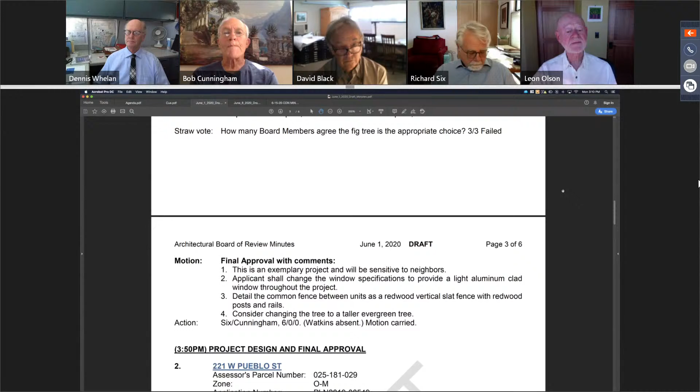This is Mary, I will take roll call. Vice Chair, Aye. Board Member Black, Aye. Board Member Cunningham, Aye. Board Member Olson, Aye. and Board Member Whalen, Aye. Okay, motion passes. Thank you.

Moving on to the approval of consent calendar for June 8th and June 15th. Are we taking them as a group of two? Let's just do the 8th first.

Move that we approve. Second. First, let's go through the motion. Item A, 300 West Pueblo was given project design and final approval with comments. Item B, 2015 State Street was given project design approval and final approval with comments. Item C, 424 Por La Mar Drive was given project design approval with comments. And 101 South Canada was given approval of its review after final with condition.

All right, so you want to repeat those motion and the second, please? I'll move that we approve. Second, second, thank you, Cunningham and Olson. So we have a motion on the floor.

This is Mary, I will take roll call. Vice Chair, Aye. Board Member Black, Aye. Board Member Cunningham, Aye. Board Member Olson, Aye. and Board Member Whalen, Aye. Motion passes. Thank you, thank you.

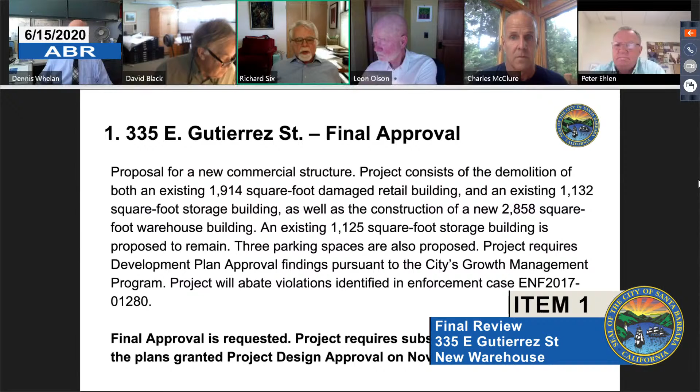Item number 1 is 335 East Gutierrez for final approval. This is a proposal for a new commercial structure. The project consists of demolition of an existing 1,914 square foot damaged retail building and an existing 1,132 square foot storage building, as well as construction of a new 2,858 square foot warehouse building. An existing 1,125 square foot storage building is proposed to remain. 3 parking spaces are also proposed.

The project requires development plan approval, findings pursuant to the city's growth management program. The project will abate violations identified in enforcement case ENF 2017-01280. Final approval is requested. The project requires substantial conformance with the plans granted project design on November 4th, 2019.

I see that our applicant is present, so please identify yourself and begin your presentation.

Peter, you're on mute. Mr. Ehlen, you have to unmute yourself using the microphone icon. I'll send you an unmute request as well. If you just accept that, there you go. Can you hear me now? Yes, we can. Okay, life is good.

Thank you, board members. I'm Pete Ehlen, architect for the project, and with me today is Chuck McClure, our landscape architect. As Richard said, we received our project design approval last November, and we're here with some updates and changes we've made to the plans since you gave it the project design approval. Our real goal here today is to get final approval and get into the building department. If you have additional concerns, we're happy to address them, but we'd like to do that while we're in the building department.

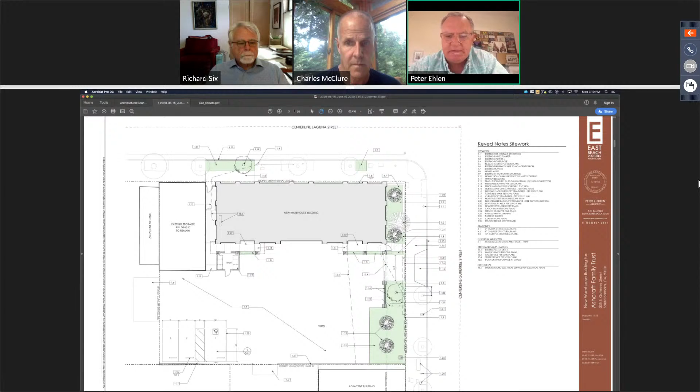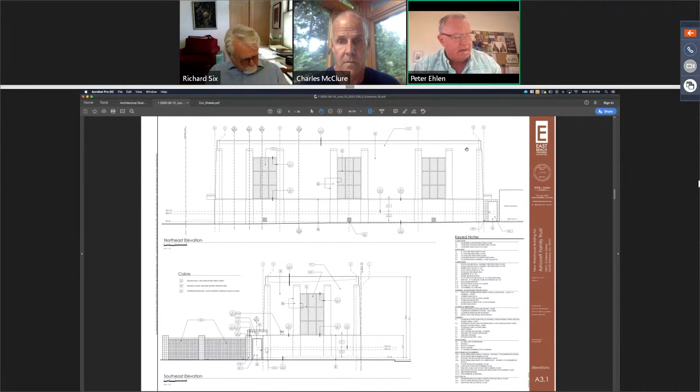On the southeast elevation down the bottom, you can see where we have the gate. There you go. Going to an exposed block just for the columns there, just to break up some of the monotony that it was starting to look like to me. In addition, we've got a fire bell detail on there as well.

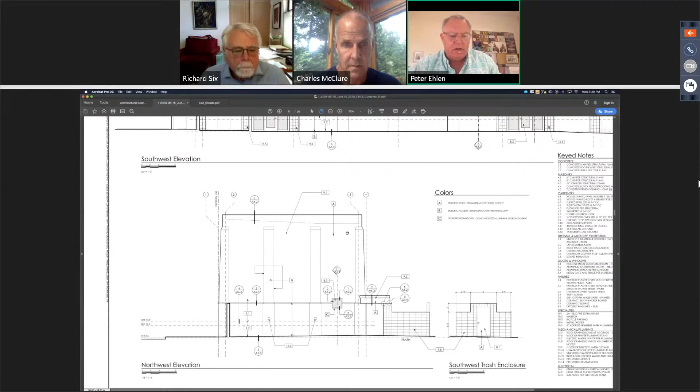Then we go to the next sheet, sheet number 9. Again, pretty much what you saw previously, with the exception that the columns on the southwest elevation there would just be an exposed block and a scored 8x8 pattern. On the northwest elevation, we have a couple of downlights in the wall, you can see right in the middle there. That's the extent of the exterior lighting on the building.

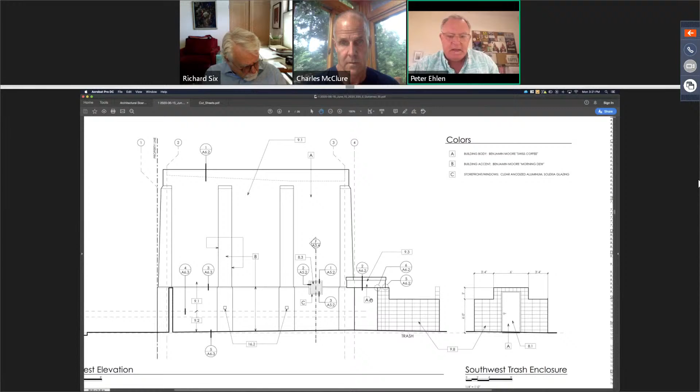There's a window we added to that wall in the restroom, so we don't have any mechanical ventilation. And then at the trash enclosure, going to an exposed block, playing around with the block pattern to give it some more interest. Off to the next sheet, number 10.

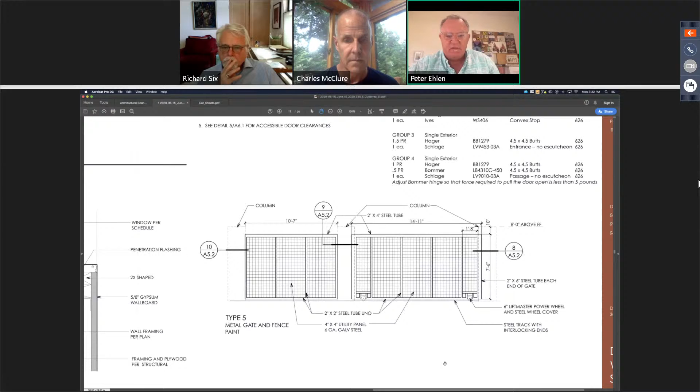Now off to sheet number 13. The lower right-hand corner just shows the gate and the fence along Gutierrez Street. It's steel, painted. We'll use a 4-inch by 4-inch heavy duty wire for the gate itself in the middle. And if you look on the upper left side of the sheet, details 8, 9, and 10 just show how the gate's going to go through the columns.

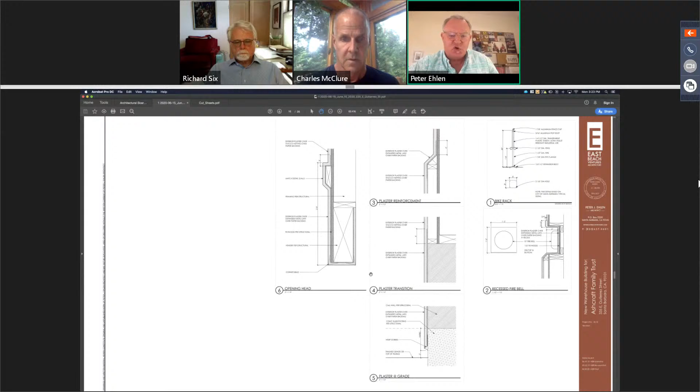If we go to the next sheet, which is 16, yeah, just some additional details. So number 6 is that large opening into the warehouse. We added some detail on the top of that, and it shows our fire bell detail.

So those are the changes and updates and clarifications we made on the plan since you guys saw it last. I'll let Chuck talk a little bit now about the planting plan. That's sheet number 23.

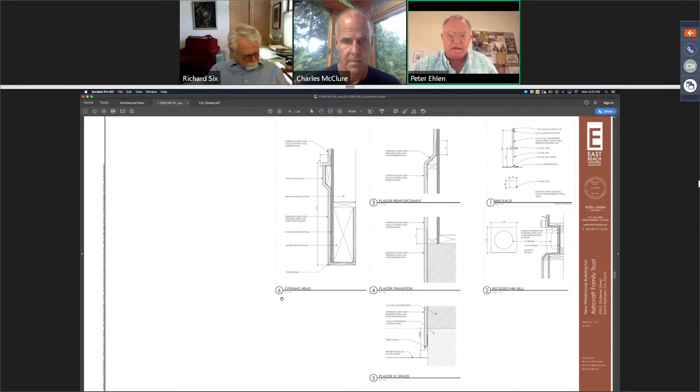Okay, like Pete said, there's really two things that are different. This down here in the lower right-hand corner is the retention pond, and I've got Juncus patens in mass.

And then at the corner of Laguna and Gutierrez, there's an existing queen palm. I'm adding two more, so when you're coming down Gutierrez you'll see that queen cluster. As you move along Gutierrez, you'll come to the golden medallion tree, and then you'll jump back to two queen palms coming out of the retention pond. That's the main difference you'll see from today to the new condition.

On the street trees, there's only one new additional one on Laguna. And then along this north part of the building, we've got an extremely narrow little 4 or 6-inch planter between the sidewalk and the building. I'm proposing equisetum, or horsetail. It's not on the drought tolerant list, but I'm asking if maybe we could have a waiver.

My second choice was English ivy, but I'm afraid the English ivy is going to get out, break out of the niche, and look kind of unkempt if we don't have good maintenance. And oftentimes on commercial projects, all projects really, we don't have good maintenance. So I was wondering if Bob and David could have a think about that. And that's all.

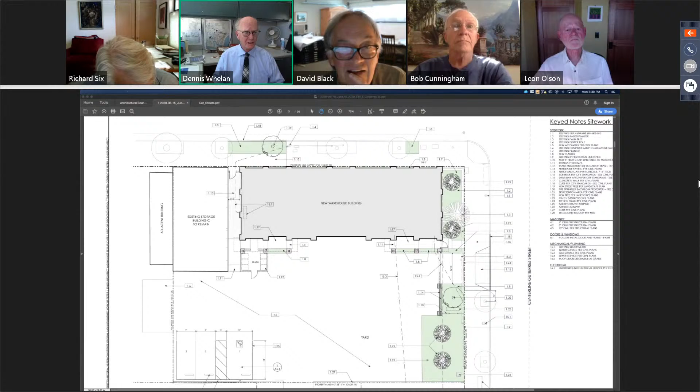Well, this is a first to be first. I'm at somewhat of a disadvantage since this project first came before the board before I was a member. A quick question for staff: I understand that it came in November. Were there previous visits before November? Yeah, so this was a project, I believe it came twice before it got PDA, and we're here at final approval.

So any members who did not have a chance to review the entire record on this are able to ask questions, but will not be able to vote or provide comment. You'll have to abstain, but that's just in case you haven't. If you have, that's great, wonderful. Could you repeat that again, Matthew? The last two parts, I can provide comments but not vote? You can ask questions, but the way it's set up is you can't provide your comments, and you will have to abstain at the vote. All right, then, that's what the guidelines say.

Then I have no questions. I should just move on. Yeah, sorry. Thank you, Dennis. Thank you, Dennis. David?

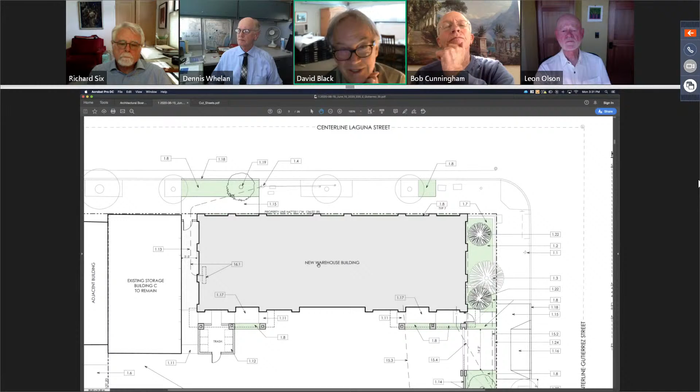Minor questions for the landscape architect. That little planter at the base of the building along the sidewalk on Laguna, you indicated that planter was approximately 4 to 6 inches. Did I hear you right? Yep, maybe Pete could chime in exactly what it is, but it's very small. And oftentimes the concrete contractor lets it slough. They're often very troublesome, the tiny little planters like that. It's actually, David, 8 inches. 8 inches, okay. But you've got a foundation and you've got sidewalk. No, I made sure that we have no foundation underneath it.

And then the other question was on your irrigation plan. I see what's designated as your backflow preventer. Is it at that location? Yeah, could we go to that sheet? It's L2, or maybe Pete's got it categorized differently, number 24 I think. You know, there's some existing valving there, and that's why the building was torn down, but it seemed like we knew the water was coming on site in that location, and I've got the backflow preventer there, and it's as far away from the sidewalk as I can get it, and it is screened.

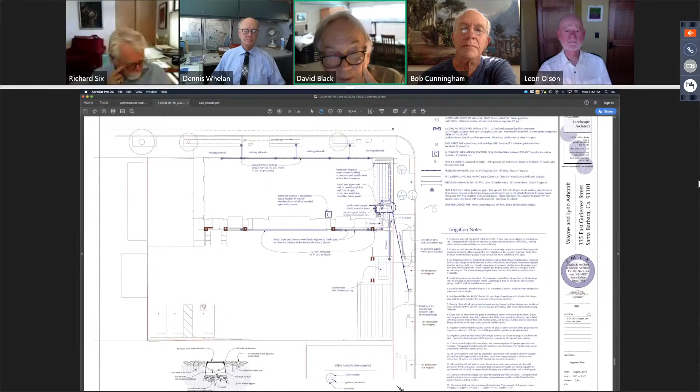Well, maybe I'll limit this to comments, but could you just tell me what those plants are? Because it looked as though it was trailing lantana, and I sort of questioned whether that would be high enough to actually screen a backflow preventer. Okay, could we go to the planting plan? If I'm looking at it in the right place. Right, you're right, it could be tucked behind those Raphiolepis. I understand the point, anyway it's just a little heads up, but okay. That was my only questions. Thanks. All right, thank you, David.

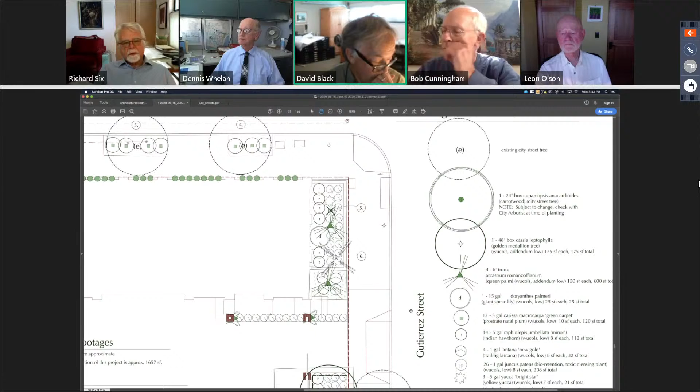Bob? Thank you. Let's see, try to separate my questions from comments.

Okay, where David was just referring to the lantana around the irrigation equipment. Why have you spec'd gravel as the ground cover there, Chuck? Well, I just think that when plants come out to a sidewalk or hardscape, the gardeners often cut it off, and you end up looking at a bunch of sticks, which makes the plant rise vertically. So I was going to use it close to the palm so they could lengthen out without being cut heavily. Since that's the case, I thought a tan gravel would serve as the final ground cover.

Okay, thank you. Could we go to the building elevations, please? I have a question for Pete. Okay, this works at the... I can't read it, it's small on my monitor. I think it says northwest elevation. Pete, you've got a CMU wall connected to the building with a gate, and on one side of the gate you've got a CMU column, and on the other side a plaster column. It seems a little strange to me.

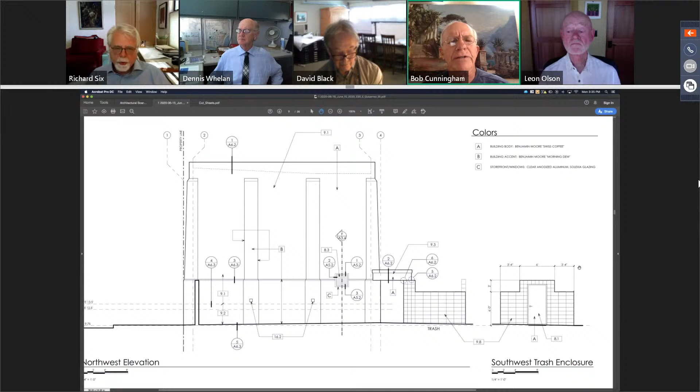I think you've got a similar situation on the other side. Is there a particular reason you wouldn't want a plaster column on both sides of that gate to give it some balance, or is this a design decision you made because you like the look of it? I'm not criticizing, I'm just asking.

Yeah, if you look at the upper part of the sheet, Bob, on the southwest elevation, on the left corner there, where it comes around. We're going to have the trash enclosure kind of in front of that. I can see your point, and same thing on the other elevation. It just seemed to me an interesting combination of materials and form, and kind of fun, to be honest with you.

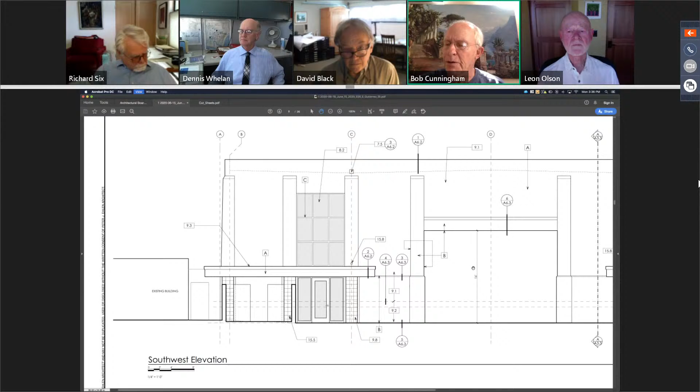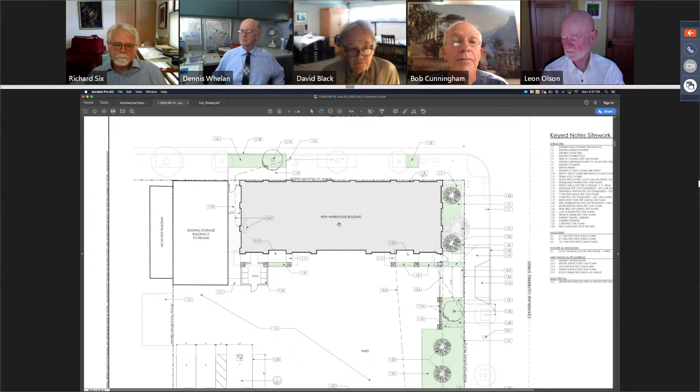Okay, one final question. I've spoken to the urban forest superintendent and city arborist about the tree wells on Laguna Street. He would appreciate it if you could enlarge the one tree well you're already proposing, to remove some lifted concrete, and balance that by removing a similarly sized panel of concrete on the north side of that planter. These tree pockets are in pavement, and there's no parking along that curb. The more open ground we have around the street trees, the healthier they'll be. So we'd have three longer planters. That's fine, you can do that. Okay, great, that's all my questions.

Thank you. Oh, actually one more question, for Chuck. You've specified agapanthus alongside the driveway off of Gutierrez Street. I'm wondering whether you feel strongly that's the most appropriate plant for that location, given the potential beating it might take from pedestrian activity around that spot. Well, I'm open to suggestion. I just think that plant's quite tough, and that was the thinking, that it's pretty hard to kill. I don't know, but I'm happy to hear any suggestion you might have. Okay, well, I'll withhold the suggestion for the comment period. Thank you, all right, I'm done.

Okay, thank you, Bob. Leon? No questions. Right, thank you, Leon. Questions.

So Pete, the newly exposed CMU, is that going to be just gray CMU? Yeah. Okay, thanks. And just a point of clarification, for your drawing accuracy, I noticed the electric plan does not include and power the canopy, the six canopy lights on the exterior. You might want to catch that.

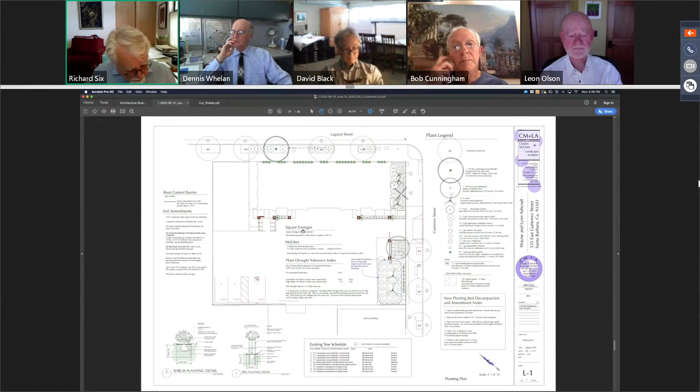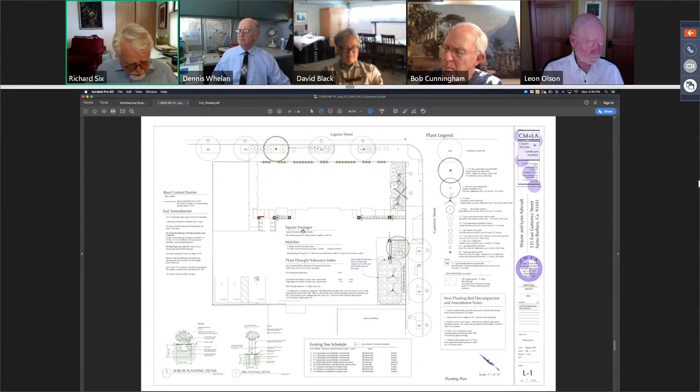Yes. Okay, thanks. And then, are you going to paint the gate? I think so, yeah. And that would be the accent color? The accent color, exactly. Okay. And then these flood-proof openings, you said there are two, can we go to the elevations, please?

It'd be the sheet before this one. Yeah, those three flood openings. This is a warehouse, and we're in the flood zone, so we need to let water flow through the building. So those are just openings.

So what are the size of those? They look like, it's 2 blocks, so it's 16 by 16. Okay, very good, I get it.

Okay, and just on the Gutierrez elevation. It'll be on the next sheet. Yeah, there you go. No, I'm sorry, go back.

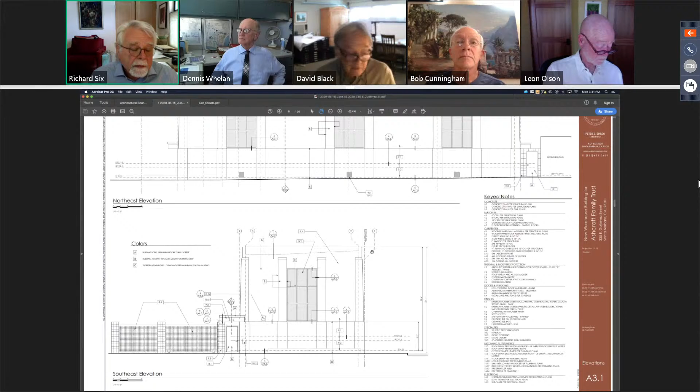So was there a definite functional choice to have a solid steel door at this street entry rather than, well, what was your thinking, rather than continuing the nice decorative fencing material to make kind of a door/gate? Is there some functional thinking on that?

No, the only functional thinking really behind the door was security. This place gets broken into a lot, so that's kind of where I was coming from initially.

But it's got the gate right next to it, Richard. So that might be worthwhile taking a look at, see if that brings some more interest to it.

Well, that leads into my comments, but thank you for that. Okay, so we'll start with comments in the same order. I guess, Dennis, you have duct tape over your mouth, so we'll go to David.

Okay. Regarding that little 8-inch planter along Laguna Street, in my opinion, I think that's too small for a real planter, especially one that may not get much maintenance at all. So I wouldn't have a problem with just eliminating it altogether, but that's your choice, of course.

Then, I want you to feel comfortable with screening that backflow and whether or not the trailing lantana is going to be adequate to the task. Those are the only comments I had.

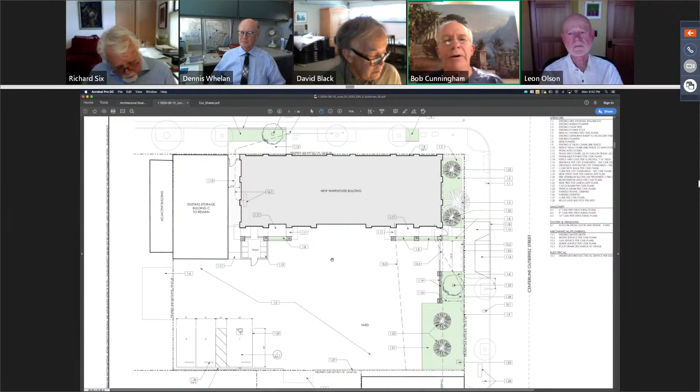With regard to that 8-inch wide planter, unfortunately, Chuck, I think you were alluding to the possibility that David and I could offer you some assistance with getting a waiver on the use of a high water plant or a medium water plant. We don't have that authority or flexibility. So you'll need to deal with water resources on that, and good luck.

I would suggest, if you don't have confidence in the maintenance, even though I would love to see English ivy growing up this building, if you don't have confidence that maintenance will take care of that properly and have it done the way you and Pete believe it should be done, then I would say skip that altogether.

I think David makes a good point that it's an awfully narrow planter, and without something really tough and shade tolerant and drought tolerant in that location, maybe you ought to just dispense with that altogether. So that's my opinion on that.

I think at the backflow preventer, I think you should consider some taller plants, and rather than go with the gravel, because again, you're not confident in the maintenance with regard to the lantana, pick something that is, let's say, maintenance proof.

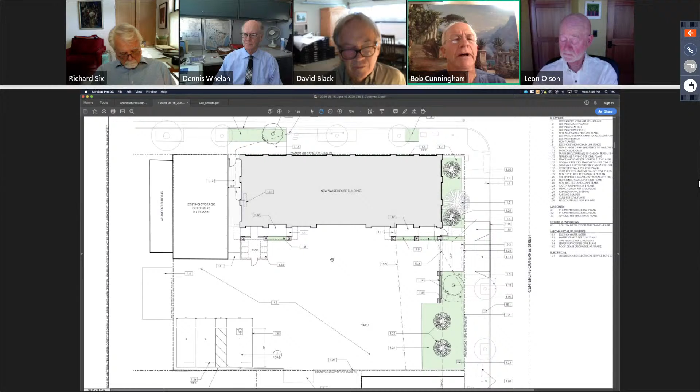With regard to the agapanthus, I disagree that it's a tough plant. I love the plant, but growing next to a walkway, you're going to have the flower heads drooping over the pathway and getting kicked by folks walking by, and maybe even tripping people. So I would reconsider that, and maybe a Dietes, a fortnight lily, or Dianella would be a better choice.

Finally, with regard to the planting that you're proposing in the Laguna Street tree wells, I think you'll have problems digging holes to accommodate the Carissa that you're specifying in those tree wells, which are pretty substantially occupied by surface roots. I think you might want to consider something like a Kurapia that you can get out of a 4-inch pot, which might cover the planters pretty nicely without having to really find root space for the small plants. I just think you're going to have no success, or very little success, even installing the Carissa, let alone encouraging it to grow when it's competing with the roots.

Bob, where is that located on the plan, the Carissa?

On the planting plan, he has Carissa shown in the tree wells along Laguna Street at the back of the curb. I get it. Okay, thank you.

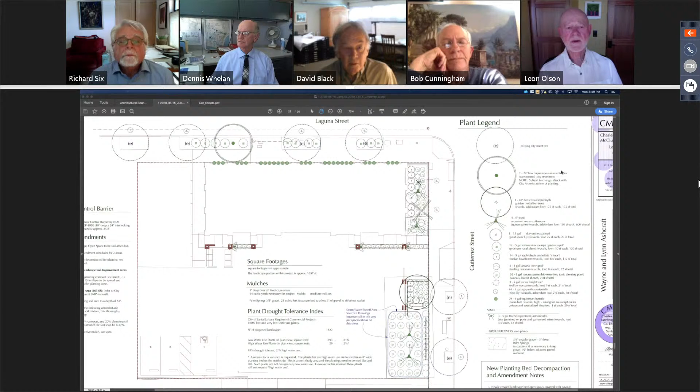Well, I have a question with regard to the architecture. Is everybody satisfied with it as it's presented? Raise of hands, show of hands. Except for the gate.

Okay, as I mentioned, I've got some issues with the landscape design. I would like to know from the applicant whether or not they're willing to revisit the gate and revisit the landscape. I would then make a motion for this to be continued to the consent calendar where we could approve it. You're on the board, or are you submitting?

Yeah, me and an architect submitted a project. And is somebody talking? I'm sorry about that. It looks like someone accidentally unmuted themselves, so I went ahead and muted them. Sorry about the interruption.

Okay, so if I can hear from Pete and Chuck regarding the issues that have been brought up, I'd like to either approve this with conditions or continue to the consent calendar for the few minor issues to be resolved next week. May we hear from the applicants?

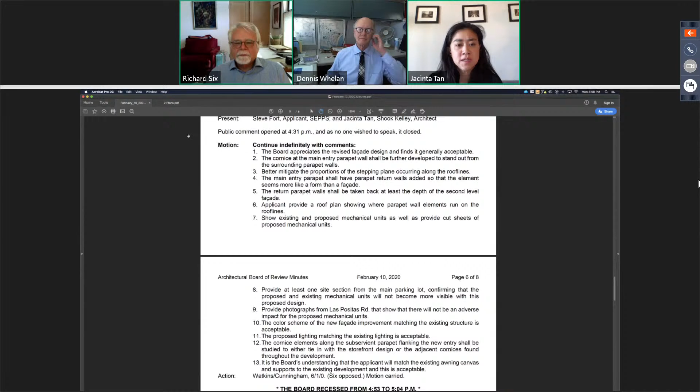Hi, Richard. Hi, Steve. Do you want to speak before Jacinta? No, no, I think you covered it. We're here for PDA and final, and I think Jacinta is just going to dive into addressing your minute comments there. Okay, yeah, thank you. I thought it'd be best to just go through our drawing set instead of jumping around from sheet to sheet and addressing your comments, if that's okay with you guys.

Yes, so if we could go on to page 2 here. We've got our site plan, just to refresh everyone's memory, because I think the last time we met was back in February. This is for an expansion of Gelson's Market into the existing adjacent space. This project specifically is looking at the facade remodel of that space. It was formerly a Chase Bank. We can move on to the next page.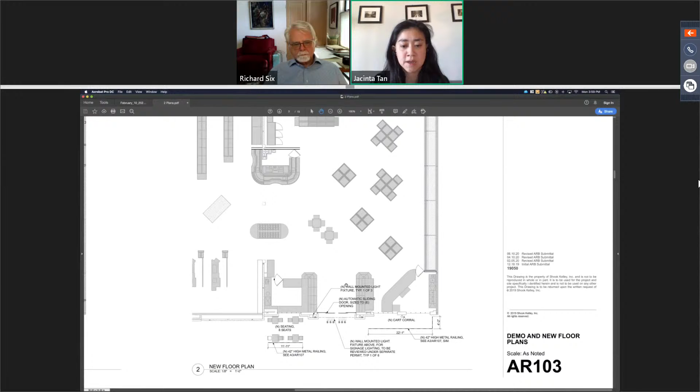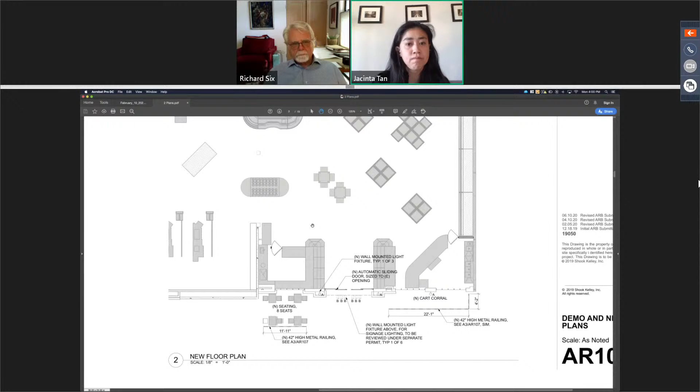And here we have the floor plans, just for reference. If you look at the bottom right of the page, that's where our scope of work mostly focused. On this plan we've shown the exterior lighting to be added, the outdoor seating, and the railings. The furniture for the seating matches what's existing at Gelson's, and same with the construction and finishes of those railings. I don't believe we previously had any comments regarding the outdoor seating, the railings, or the lighting specs—those are all to match what's existing at Gelson's. We can go to the next page.

And this is the roof plan. We're showing on the right side the new roof plan, and on the left the demo roof plan. One of the concerns raised in the last meeting was the mechanical units on the roof and what would be visible. So here on the left side we're showing all the existing units that are actually going to be removed. There's one exhaust fan that'll be relocated to the Gelson side, but the dashed boxes you see are existing rooftop units that'll be removed.

On the right side, we're showing the one new unit that'll be up on the roof. Based off some cross sections we did of the building and the site, which are later in the drawing set, it became evident that we will need to add a mechanical screen. Parts of it will be visible from the low parapet, so we went ahead and added a mechanical screen there. Again, the construction and finishes will match what's already up at

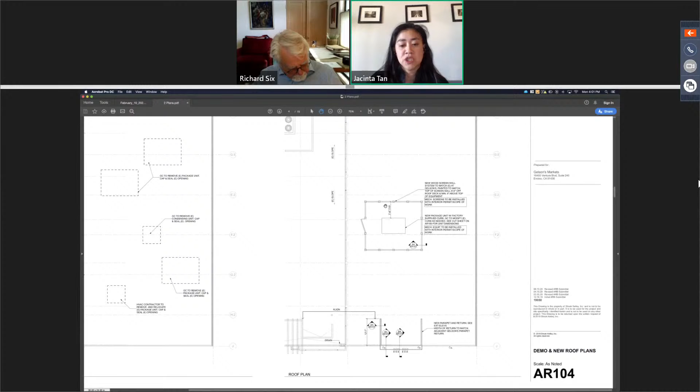Gelson. And then the other area of concern was the return of the parapet. I think it was expressed that we needed to create a deeper return on the parapet, so it's not just a facade, but would have some depth and add a little dimensionality. You can see right there, we are bringing the parapet back 12 feet 7 inches, and it'll match to the line with the existing parapet return on the Gelson

side. And if we can move on to the next page. Here you see the exterior elevations. Up top is what's existing, and at the bottom, that'll be our proposed elevation. Not much has changed in these elevations from our last meeting.

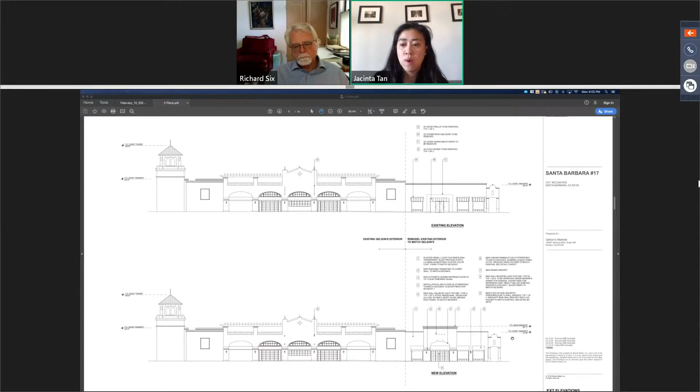One of the concerns was the cornice, and I think there was general consensus that we needed to give it more presence and create a better hierarchy between the cornice of the high parapet and the low parapet, and that is indeed what we went ahead and did. The higher parapet has a much more elaborate cornice, and we simplified the cornice on the lower parapet. So there definitely is prominence on the high parapet, and the lower parapet is much more subservient.

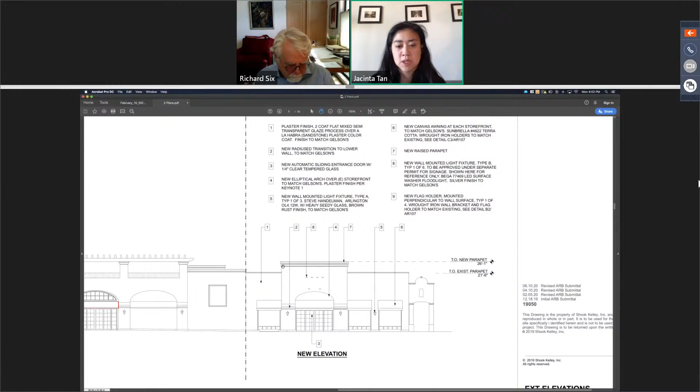And on the next page, we've got some renderings of that.

Pardon my interruption, the sound quality is just a little low. Jacinta, do you mind speaking up just a little bit more in case others are having difficulties? Thank you. Sure, and I'll pull my mic in a little bit too.

That's great. So here's the two renderings we have of the exterior, and we've got sections too through the site showing how the new mechanical unit on the roof will be visible from the low parapet. The mechanical unit is that little white box there, and the site slopes up from the front of the store towards State Street. So if you're standing at the far end of the parking lot near State Street, there is a good chance you will see that mechanical unit, so we went ahead and put in a mechanical screen there.

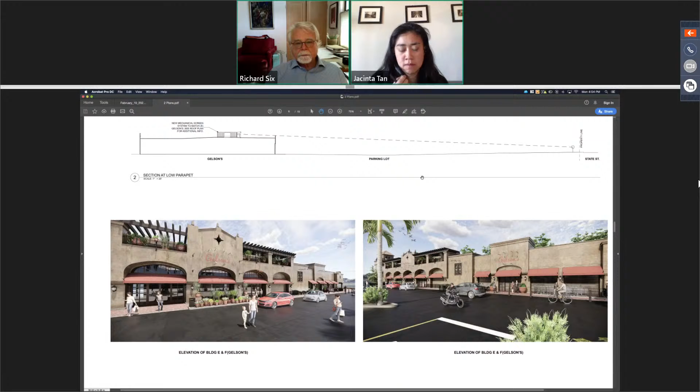Okay, and then moving on to the next page, I believe we have some wall sections to the parapets, some details of the cornices, details of the parapet construction, the railings. Once again, we are trying as much as possible to match the specs of what's existing at Gelson.

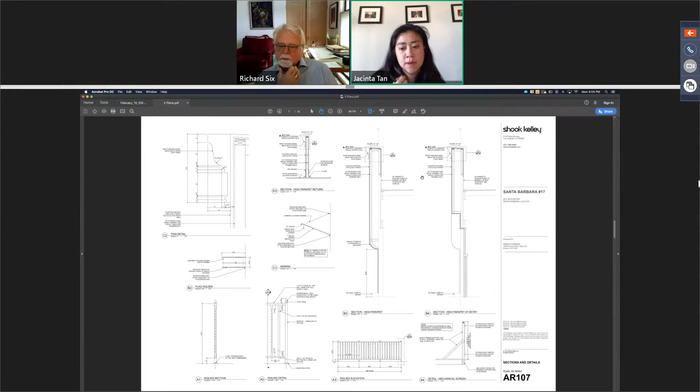All right, is that your presentation then? Yes, that wraps it up. All right, thank you very much.

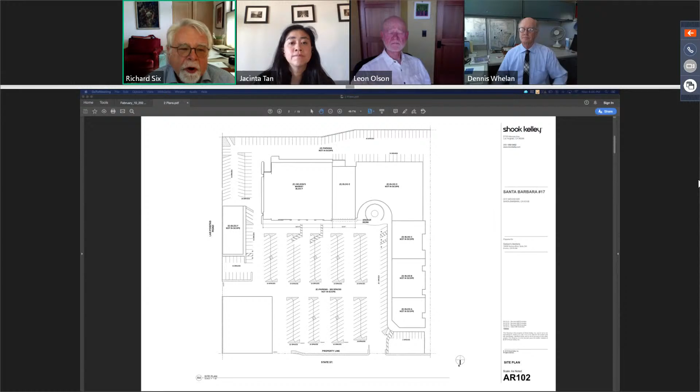First, starting with Leon. I have no questions. All right, Dennis? No questions. David? None for me either.

Bob? Yes, question. I may have missed this the first time around, but currently there is planting on the facade of the building that's being remodeled. There is a nice blue skyflower vine over the window, and I'm really sorry to see that go. I'm wondering whether the applicant has been able to find any room for an in-ground planter along the face of this improvement so that we can continue to have some landscaping.

That was not something that we had planned for, but it's definitely something we can look into adding. Thank you, that's no further questions.

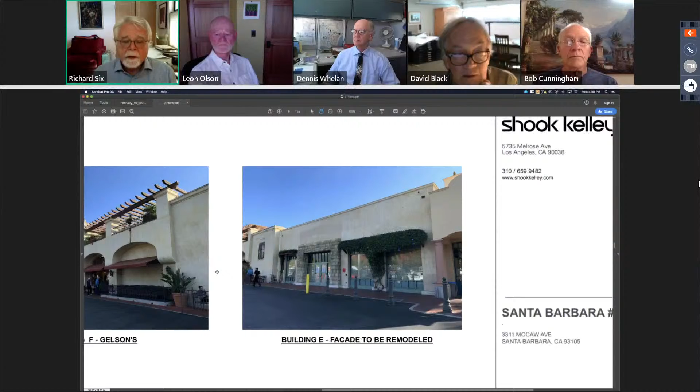Thank you, Bob. On that same topic, my question - in regards to that mature plant, I think you can see those nice vines on the elevations. Is there an alternative to providing new planting? You need to go to the photos, not the photo sims, but the photos. Does the applicant need those canopies? It's the very upper right hand corner. They're manicured a little too much, but they are pretty nice vines.

Is there an opportunity just to have the canopy over the entry, or is it functionally desirable? And to the rest of the board, is it more important aesthetically to have this continuous number of canopies across the entry here? So first let me ask the applicant whether it would be a problem to maintain these and have these remain.

I don't think it's a problem to maintain them. I know that the clients did want the awnings over, especially the seating area, to help provide shade for anyone sitting in that area. In terms of the plantings, I personally don't have any objection to them, but I think the idea here was very much to match the design aesthetic of the Gelson store, and that side of the building does not have any plants.

I get it. Okay, but I can see that these are really nice plants, and so I get the desire to keep them too. I understand that. Okay, very good. We'll deal with that in our comments for the rest to see how the rest of the board feels.

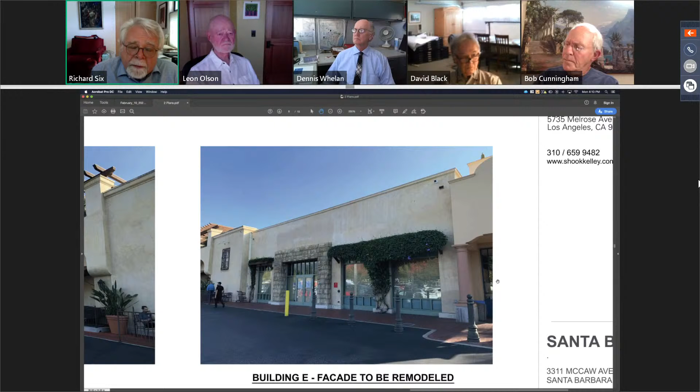Number two question is, what is your intention on permitting of the screening elements? You want us to permit them now, or review and permit them during the interior improvement plans? We'd want you to act on them now. Okay, very good, thank you.

If we, in that case, your details between structural and architectural are inconsistent. So I would say it won't hold the project up, but your structural needs to reflect your architectural, and your architectural needs to deal with waterproofing as these wood elements, posts and back braces hit the roof. There's no indication of roofing details at those, so those need to be looked at, but it's not an aesthetic thing, so we won't hold up.

Question - if we go to, I think it's the second sheet with the plan, first of all. Let's see, the third sheet. I think, yeah, that one. You have some working areas, some counters, and so forth up against the glass, and I'm concerned that...

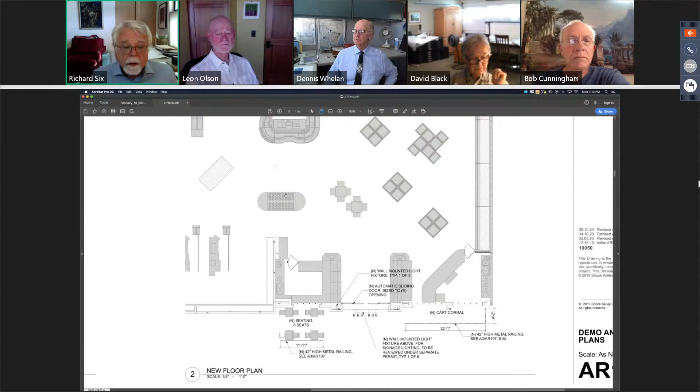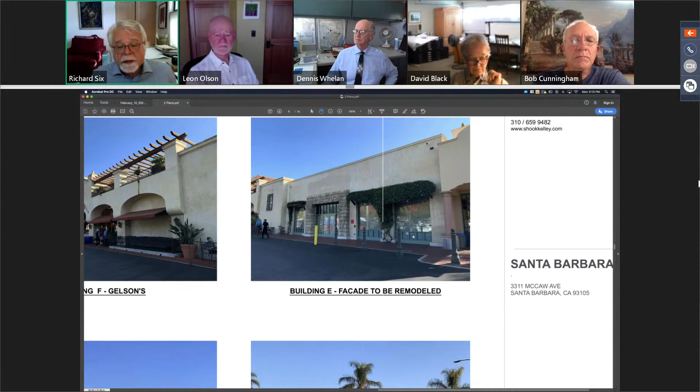Well, if we go to the photographs - again, the upper right-hand corner, it looks like the solid sill is just at counter height. Is that correct? I do not know the exact measurements of that, but it'd be close. There is a chance our fixtures or our cabinets might peek out over that. Okay.

Let's see, I think those are... do your plans indicate that the signage that you're showing on the front of the building is not under this permit? I do not have that noted, but we will be pursuing that under a separate permit. Okay, these plans will need to say that it's not under this permit. All right, those are my questions.

So we'll go to comments. Leon? I don't have comments. Right, Dennis? No comments, Chair. David?

In general, I think it's a nice project. They've done some work responding to our comments, and I think it looks good to me. Okay, thank you, David. Bob?

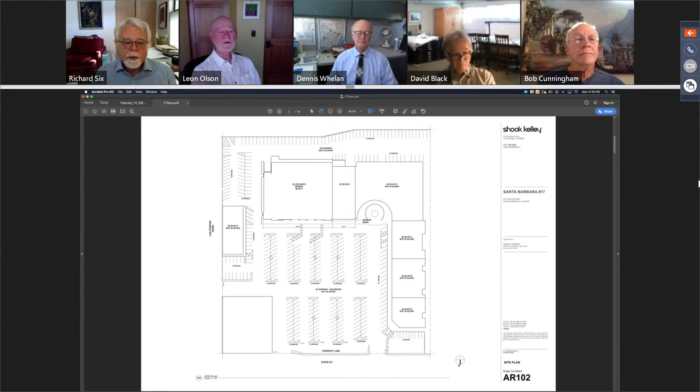Leon, a raise of hands? Could you repeat that, Chair? Yeah, I need to understand better. Could we maybe look at page 6? I think that has the renderings on it. That was best. Thank you, that will help us with some visuals.

All right, so there are four canopies, awnings, on the new part of this project. The two to the right would be dropped in order to save the vine. The other two would remain. Is that an acceptable solution? Leon?

Well, I have a problem with how they're trimmed, how the vines are trimmed. It doesn't seem to me that it adds the element of landscaping that we might want. So I almost prefer the awnings.

Okay, very good. Dennis? I'm sort of neutral on the vote. I could go either way. The awnings do look fine to me as a continuous item across the facade. All right, so you're neutral.

Neutral, yes. David? Yeah, I would favor retaining the awnings, and then, as Bob suggested, maybe some pots with some vertical plant elements in it. I think that would be fine. And Bob?

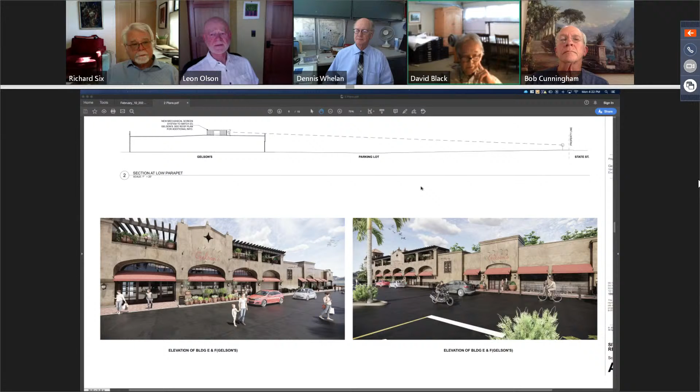Leon? I haven't made one of these yet. I might as well jump in, be my first one.

I move that, first of all, we be positive and compliment the applicant. The board has reviewed the project and is in agreement that this is an appropriate design, and wishes to move it to project design and final approval, with a couple of provisions. I think we wanted to add some provisions in there and bring it back to consent.

So I need help with those provisions we asked for. Richard, you had one. An indefinite continuance to consent in order for the applicant to provide a number and type of potted plants to replace the loss of the vines. The pot shall be specified, the plants and the number of plants, and I think Bob would have an interior reservoir in the potted plant container. That's not a bad idea.

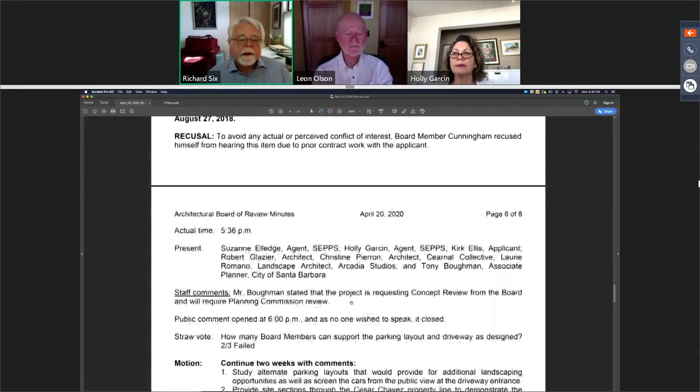So we were before you back in April 20th. Mr. Chair, would you like to read those minutes or would you like us to as we go through the presentation? Whatever would probably be more efficient, Suzanne, to go through the structure, Mr. Vice Chair, if I may have comments. Yes, sorry, Mr. Vice Chair, if I may, this is...

So this project is coming before you as a review after final because it's being processed under a PLN that already received final approval from you all. At that time, they were proposing a non-residential building. They have returned for what I believe is a parking lot and solar array that needs to go to the Planning Commission for a substantial conformance determination. We do have the planner, Tony Boughman, in the audience, so I'm going to invite him to explain the rest to you.

Thank you. So, Suzanne, or? Sure, let me just jump in and then Tony can add whatever he needs to add. So we came to you on the 20th of April and we will cover your comments in our presentation.

We were supposed to come back a couple of weeks later, but in the interim, we were approached by Public Works about the possibility of relocating the access into the parking lot from the existing curb cut where we were proposing it, which is central to the site, to the more northerly existing curb cut. We worked with Public Works for a while to determine if that was feasible, how it might change public improvements and so forth, and ultimately decided that it was superior and helped us address some of the concerns your board expressed last time.

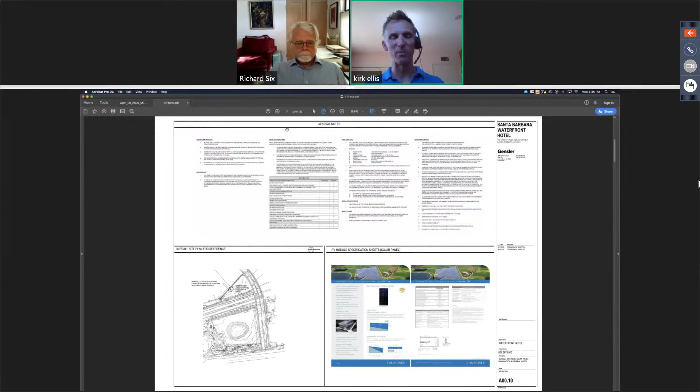So on page 2, we did update the PV panel type, just the manufacturer. But here's the main thing: on page 3 here, we're showing the reconfigured site layout. We heard you clearly before—one of the comments was to study adjusting the layout, have an alternative.

In doing this, as Suzanne said, it's a win-win. We now have the driveway inlet located further north along Calle Cesar Chavez. That comes in, we have a longer throat now. With the landscaping on both sides of that, it allows better screening. And now the parking stalls are still the same size as before, 8x16s for valet parking only.

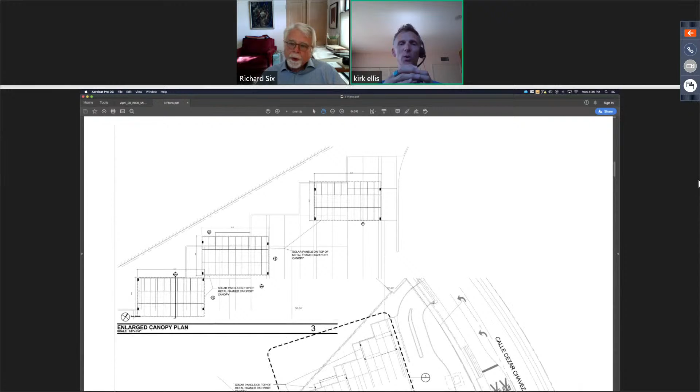We have also revised the photovoltaic carports. With this new configuration, we were able to get planting, as you'll see from Arcadia in just a few minutes, here in their plans. But we now have 3 different array sections instead of one long section that we had before. We've chosen to go with 3 separate array carports. This makes for lighter structure, simpler, visually lighter. So we have different pieces. They all relate - they have the same pitch angle, of course, in the PV panel.

So it creates kind of a nice rhythm along that flat backdrop of the building that's just behind us to the northwest, which of course has no windows. So we feel that's a really good add, also to break that scale and mass down a little bit. This is basically the same PV panel area as we had presented last time.

If you could pan back out, please, to the overall site plan - thank you very much. What this allows us to do then is keep the PV panels to the northwest edge of the site. The switchgear transformer is now on the east side, almost halfway from north to south. There's a small pad that's out there, and we're able to screen that with landscaping, as you'll see again from Arcadia, the landscape architect.

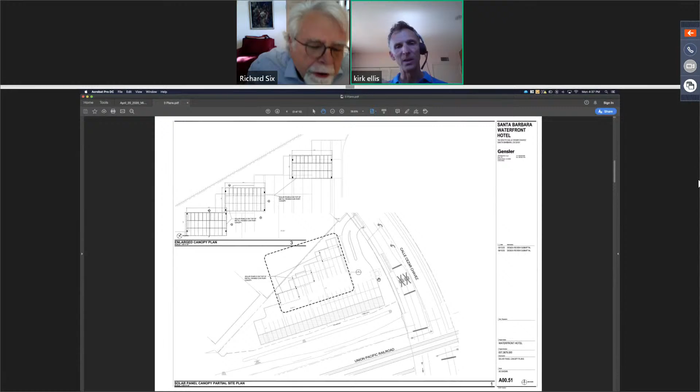This parking count here is 104 stalls, the same parking count we had before. I believe from the notes from city staff's assessment, there was maybe not a complete understanding or clear communication on our part for the parking striping for all the stalls. There are 104 stalls on here. The easternmost section near the throat is actually 4 stalls deep for the last 3 stalls. So this does represent 104 stalls here, valet parking only.

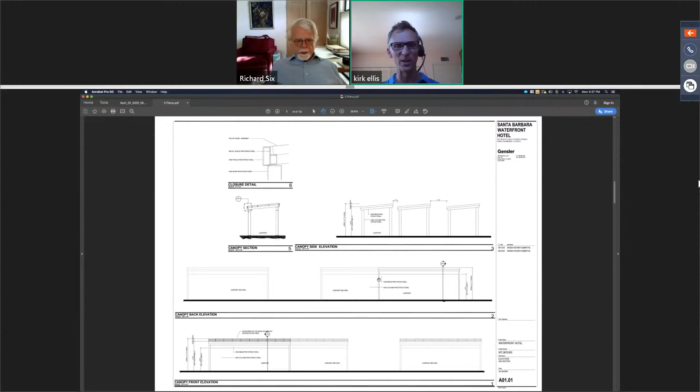Having said that, if you go to the next page of the PDF - thank you. So as I just said, in the section on the right-hand side of the page there, section number 3, or elevation 3, you can see the true orthogonal elevation of the 3 different carport sections. Same pitch angle, same framing. So again, it creates that rhythm, very simple.

You can now pan to the left, please, to detail number 5. Thanks. This is a simple section through there holding up the PV panels. This manufacturer's PV panels are just slightly larger than what we had shown before, so we've accommodated for the actual size of the PV panels. And we were asked to look at a detail.

If you could pan up, please, to detail number 6. So what we looked at is, with this tube steel section frame, which is a welded moment frame, getting a simple fascia step - so if you can come back down now to 5, you can see that step in the outside edge. Pan back over to 3 now, please. You're doing great. So with this simple architecture of the buildings behind us, with this simple architecture of these carports, we're seeing the exposed metal.

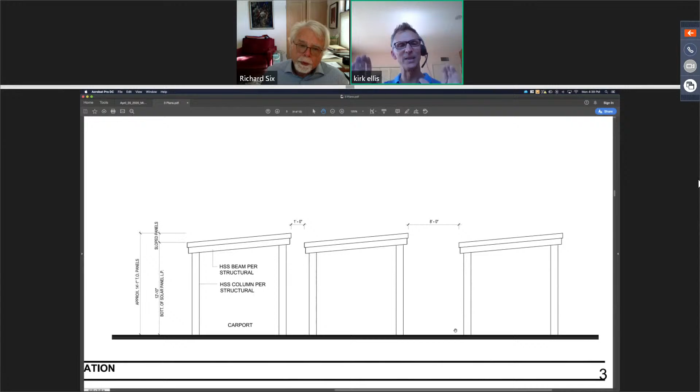We were encouraged to look at a different transition without it being too complicated. This is a fascia plate, it's brake metal. It'll be pre-finished to match the same color as the tube steel itself. It does cover the outer edge of the PV panels, but still gives us enough room for maintenance, cleaning, etc. So it's the smartest way we could get something that looks a little bit better, covers that edge, but we can still get our fingers in there to maintain, pull out a panel if need be. The heights are listed there, as you can see, which is plenty of height on this site. It works with our trees.

Also, if you can pan out now to the whole sheet, I'll take you to the bottom of the sheet. That's just our longitudinal elevation, basically seeing the 3 different arrays lined up. You can see it's the same height, same datum. So again, we have that nice rhythm that carries across the site. If you could go to the next sheet, please.

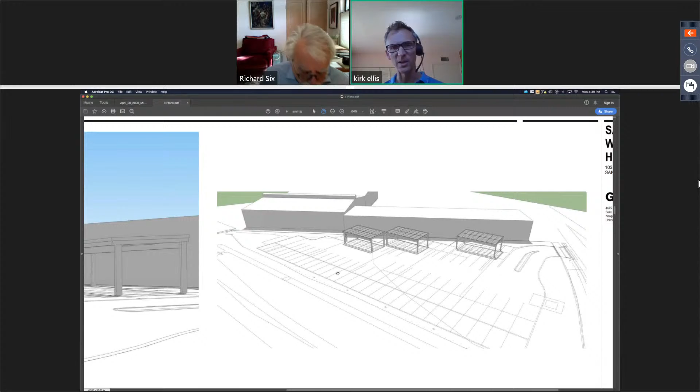And again, we've updated our SketchUp models. It's a simple model. I think in the upper right-hand corner is probably one of the most interesting, showing the relationship to the adjacent building, which has no fenestration on it.

When you see the landscaping plan, it's actually a pretty full plan, so these will be 3 small modules that have a good modulation to them. Now if you go just to the left, upper left-hand corner, you're on the right one there.

Yeah, so this is not what you would see as you're driving in. This is from the street sidewalk looking across the drive lane, and that scale now has just this nice rhythm to it. We feel that moving our inlet, the driveway, was actually a win-win because it helped us break down the scale of these PV panel carports.

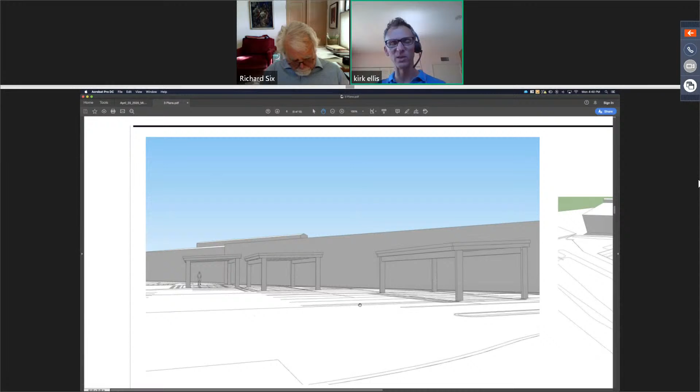If you could pan back out to the whole sheet, please. Thank you. And then the lower right-hand view, no one would ever see it from this angle, a bird would, but you get a chance to see how those 3 different arrays line up on the site.

And with our driveway now to the far north end of our site, we're going to get landscaping along that edge of Calle Cesar Chavez and also along the buildings to the northwest. So this is taking care of what we had heard back from the board previously to look at an alternative layout.

Site sections for sight lines, we'll show you that next with landscaping. The restoration plan, we'll show that next in landscaping. The overhang and pitch of the PV panels - this is the actual sizing based on the photovoltaic manufacturer and supplier. And then the fence and ground equipment, we actually have a landscape solution for how to screen that off now, which we think is a better solution in many ways.

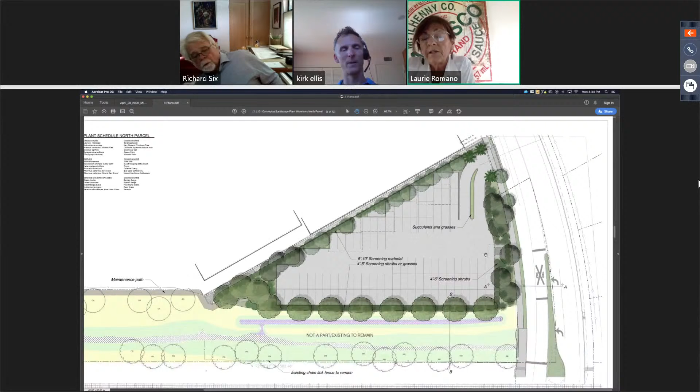Then wrapping around to the west side, we have another little grouping of sycamores, then 3 oaks, and then the rest of the low canopy trees with a hedgerow that's going to be literally a hedge 8 to 10 feet tall, as whatever we feel is appropriate. But again, something to screen the building, but not prevent the PV from doing what they need, getting the sun that they need. Okay, so do you have any questions on the revised landscape plan?

Because then we could go, I could go just to the yellow, purple color and describe the restoration area.

Okay, so moving on to the restoration area. As you can see below our green area on the southern property line, it starts with yellow. If we pan over to the left and enlarge the plant legend, zoom in on that even more, you'll see the color coded purple, green, and yellow, which describes the different coastal communities and what was planted there.

I don't see David Black as a participant today, but one of his questions was how big are those trees? All the trees were put in at 1 gallon, as described by the biologist who worked on our team. We literally just drafted her plan up.

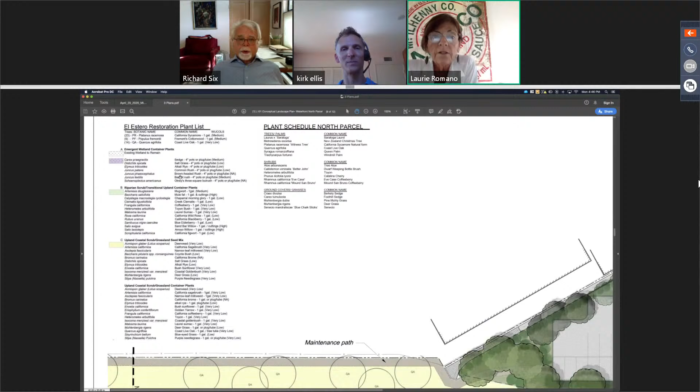This is approved through the city and is actually already installed and growing very well. So we've got the emergent wetlands, we have the riparian, and we have the upland coastal scrub, which is the yellow.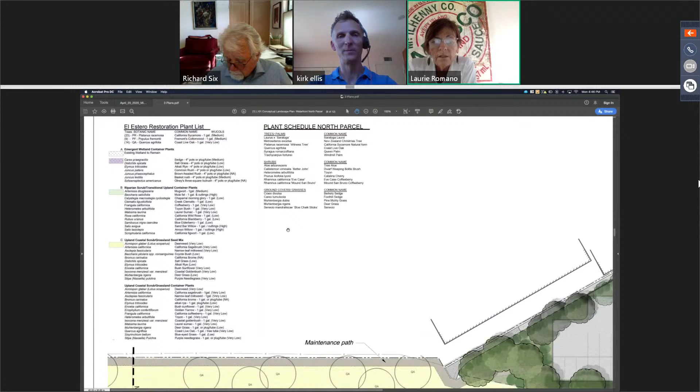Okay, you can pan out again. As you can see, the parking lot is bordered by the easternmost edge of El Estero. Then the match line on the left-hand side picks up below, and then it goes all the way along, and it ends however many feet beyond the project. This is called the Panhandle, but basically it's the north parcel lot.

So we could go to the next page. On here we have these sections. David Black was also interested in section BB, which is the actually already installed wetlands landscape.

I basically did a little sketch showing here are the sycamore trees, here are our grasses, and then these are the different shrubs. In the bioswale and in the El Estero, there's juncus, shown by the reed type grasses. And then we have heteromeles and other native varietals, grasses and shrubs. This section line is depicted from the topo BB, which was on the previous site plan.

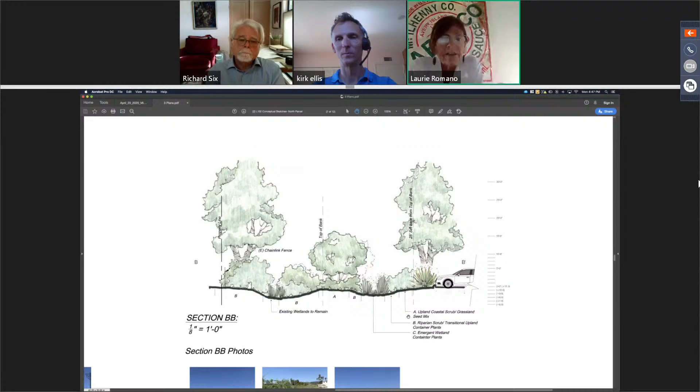Then if you pan down to the photos, right below the section, this shows you the train tracks looking due west. Then it shows the El Estero in the second picture and how well it's grown in. The third picture shows what's adjacent to the parking lot right now, but we will have another layer of shrub and trees that will clean up that edge of the restoration area.

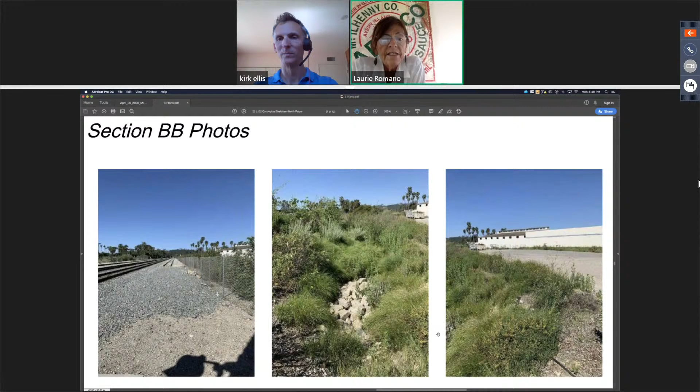Then let's see, we can go over to the left and look at section AA. David also would have wanted to see a section between Calle Cesar Chavez and the parking area. So you can see the car parked under A. Then we've got the native varietal, then some sort of flax, the existing or the new oak tree.

And then you don't see the metrosideros because that's way in the back. There's some plantings in the median, basically represented by some agaves and different plants that will be planted in there. Let's go down to the pictures for AA.

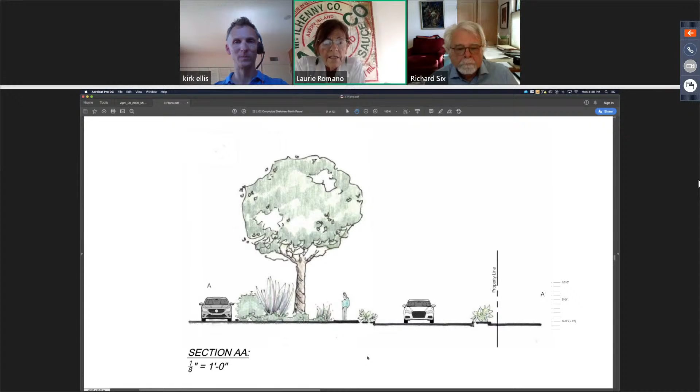That shows the existing screening today, what you see when you're standing on the bridge at the railroad tracks. You can see what is already screened from the building, so you won't see the cars if you're right there. As you're walking along you see various glimpses, but I feel that the screening from a person walking along Calle Cesar Chavez North or a car driving south, this parking lot is going to be pretty well screened.

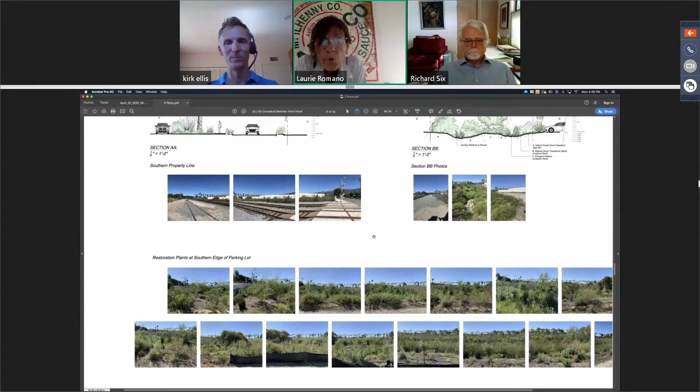And then we can go down to the rest of the pictures on this page, and it just shows more sections through the existing planting on the site right now.

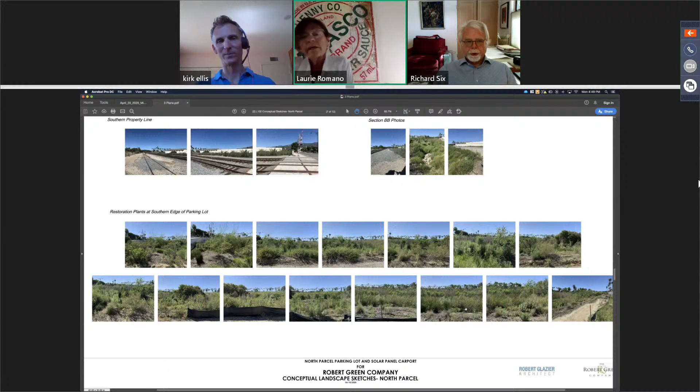Okay, and the third page is just our plant palette, and was really not in question, but it gives some ideas of some of the landscape material we're planning on using.

Regarding this particular project, where's the site lighting? Because outdoor lighting would absolutely be required, if not you're expecting people to use flashlights in the middle of the night to find vehicles. But more importantly than all of this, the very first public notice for this particular project never included the waivers that were actually needed for the project, the substantial conformance determination. It also is not talking about outdoor lighting. And again, I would just urge you to actually have someone from transportation show you on these plans right now exactly how it conforms, because you can't fit the number of parking places on it. But more importantly, this says it's going to replace another valet parking lot. That valet parking lot has 100 valet-only parking places and 50 overflow parking places. So there's a question about what is happening with this project, and I would urge you not to provide any comments to the Planning Commission positively until you have some more questions answered.

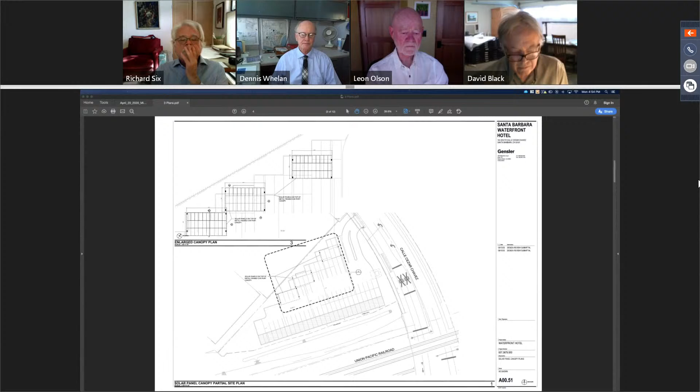Sure. Just a question about why the PV canopies are not regularly spaced, but irregularly spaced. What was the design intent there? Mr. Whelan, if I could answer, this is Kirk Ellis from Gensler. I'll answer that for you. It all had to do with the relationship of the parking area with the drainage channel along that northwest configuration. And if we put the columns right to the edge, the PV panels might extend over the property line, or over the drainage, or over the trees. So yes, you picked up there's not a regular alignment. That was to maximize the efficiency of the parking surface area, but also let the PV panels have enough room to breathe relative to the structure below them.

Thank you. Leon? Yes, I would like to have the applicant address the issue of lighting again, to review that for me.

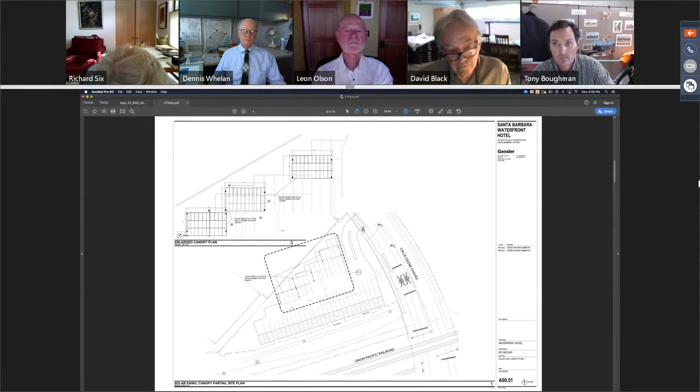Okay, and Mr. Vice Chair, Board Member Black, may I address the board? Suzanne Elledge here again. I wanted to point out that yes, the point that it's not a parking lot used by the public, it's privately operated, is one point. The second point is that our approach is to screen around the perimeter with landscaping to meet the intent of the standard requirements. Also, I want to point out that in 2007, not the last SCD but the project approved in 2007, there was almost an equal number of spaces in an all-valet lot that was approved taking this same approach. I just want you to know that background.

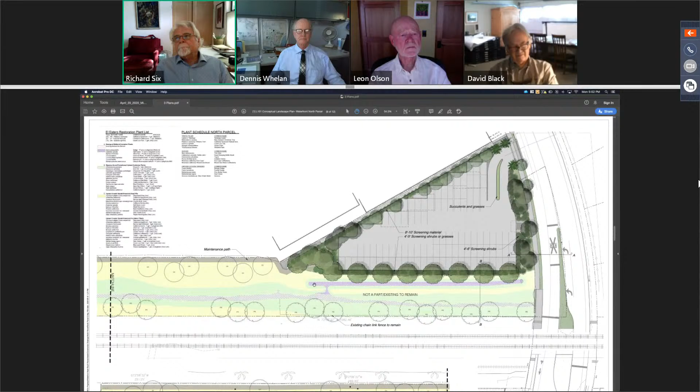My only question, well, first of all, for staff - the public brings up these questions of public notice and waivers and correct notifications. I assume that staff has reviewed all this, and we're able to continue reviewing and passing this on to Planning Commission.

Chair, this is Tony Boughman. Staff did review Ms. Scott's letter today, and the project didn't require a notice. There's no trigger for a notice. It is a project that's going to the Planning Commission, but only for comments on this substantial conformance question. The substantial conformance determination is a staff function, made by the Community Development Director. So the Planning Commission hearing is just for their comments.

Similarly, today we're asking for ABR comments. We're hoping to have the ABR comments to pass along to the Planning Commission, but the ABR comments also inform the Community Development Director on his decision of substantial conformance.

Okay, number two, Tony, are we to structure our comments on a per board member basis or make a motion? I think they can be on a per board member basis. Matthew? I believe that in the case of courtesy reviews and pre-applications, we typically just run through each member and give comments. In this case, we would need it to be part of a formal motion. Okay, thank you.

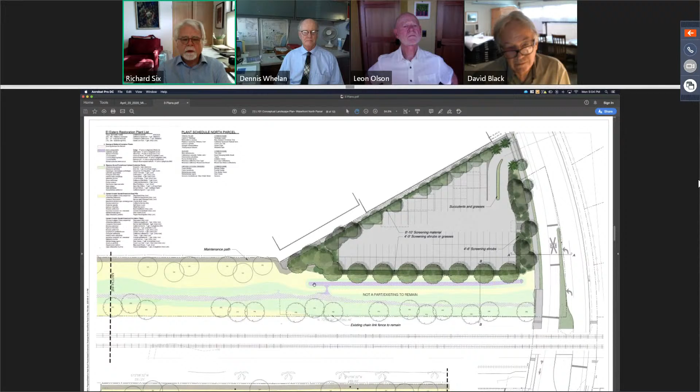Where is that located now, Kirk? Thank you, Chairman Six. So in the current plan, the three photovoltaic arrays are on the core part off to the northwest side of the parcel. If you see the eastern edge facing the sidewalk of Calle Cesar Chavez, about halfway down, you see that gray rectangle? That's the switchgear, and it's now heavily screened with landscaping. Previously it was exposed at a different location on the site, and we were proposing fencing or trellising around that.

Chair Six: Yes, go ahead. One other question for Mr. Ellis. Was there any consideration to making a pedestrian connection? I envision these poor valets running up and down the driveway and going out of their way. Could you address that, please? Sure, I'd be happy to. We didn't look exactly at the operational part of that. Usually valets are used to running in most cases. For security, we were trying not to have too many openings around the site. I think operationally that could be considered if that's the wishes of the board, but we had tried to have one centralized control location for in and out.

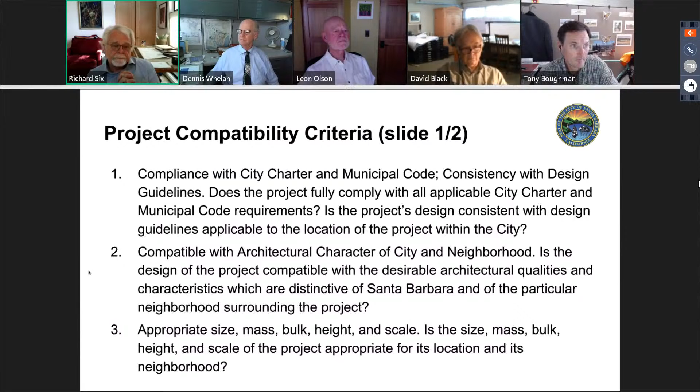Number three, the architecture and landscaping is of appropriate size, mass, bulk, and scale, as there are no significant structures proposed. As far as the board is aware, there are no adjacent landmarks or historic resources affected by this project. Also, there are no public views of the ocean or mountains affected by this project. And number six, the open space and landscaping is very appropriate, as thought has been given to significant screening landscaping at all appropriate areas.

Now we can have a second. Second. That was Leon? Yes, okay, Leon seconds. Is there any further discussion to that motion? Hearing no one, we have a motion on the floor, Mary.